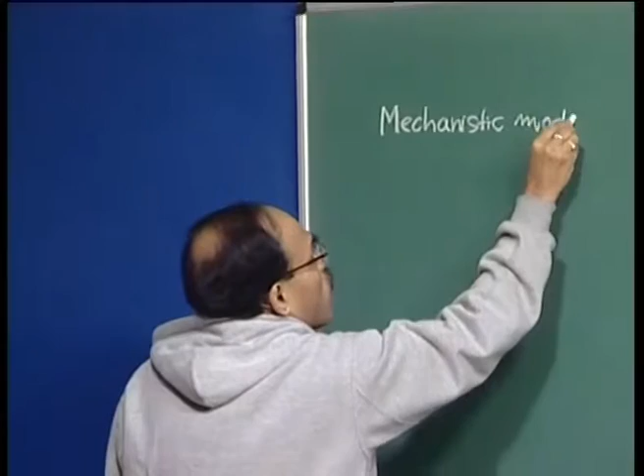Now, how many types of mathematical models do we generally encounter in steel making? Broadly speaking, we would say that we have a mechanistic model and empirical models.

There are many subdivisions possible, because empirical models, for example, can be classified based on the standpoint from which they are derived. For example, I can derive an empirical model purely based on regression analysis - I hope you have heard this term. On the other hand, I can derive an empirical model based on some dimensional reasoning or dimensional analysis, as well as some experimental data.

Finally, I can derive the empirical model also from the viewpoint of an artificial intelligence procedure or technique, such as applying genetic algorithms or artificial neural nets to derive it. So many further subdivisions are possible.

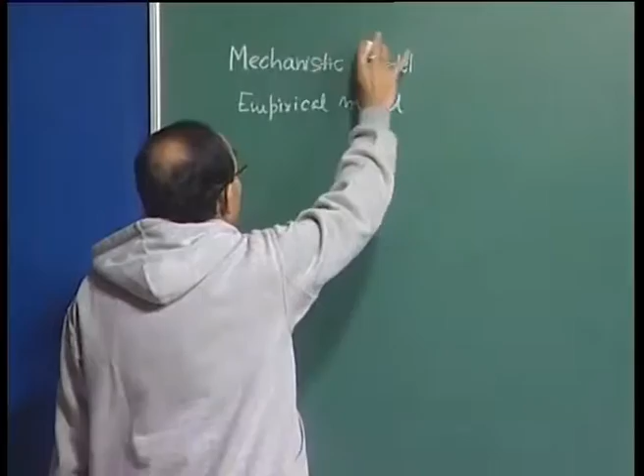Mechanistic models, for example, we can derive from various standpoints. These are, as the name suggests, based on certain conservation principles. People may subdivide mechanistic models further, say in the context of population balance, but nevertheless we would be talking about some conservation principle, some balance principle.

On the other hand, empirical models are derived purely from an experimental standpoint, embodying experimental data. The further subdivisions of mechanistic models are not of our immediate interest. We will consider models under only these two categories: either it is a mechanistic model or it is an empirical model, as far as we are concerned.

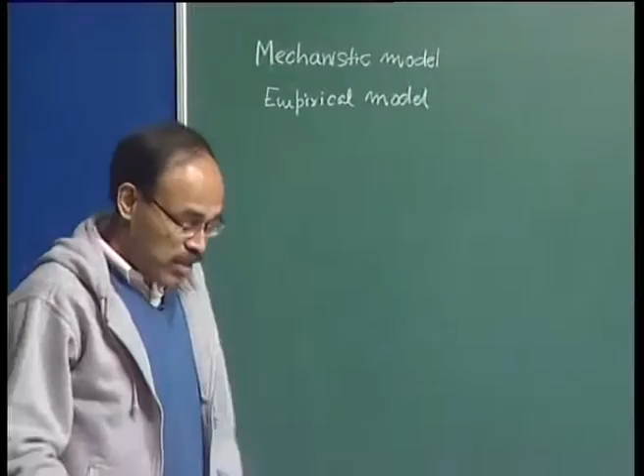Now, mechanistic models, for example, are based on the conservation principles. Conservation of what? Conservation of mass, conservation of momentum, conservation of energy, conservation of population balance, and all these kinds of concepts can be used to formulate the model.

Because mechanistic models are based on solid scientific principles, as the name itself indicates, the fundamental laws of physics these models are based on. Therefore, a mechanistic model formulated in India will equally work, provided we have derived the model realistically, in other countries as well.

But for example, an empirical model which we may develop and which may be specific to a particular plant may not work for all different plants, because empirical models contain experimental data points which are specific to a given plant or given set of conditions. So they lack universality. On the other hand, mechanistic models are sufficiently general, not governed by geographical boundaries, and they work across geographical boundaries, provided we can formulate the mechanistic models correctly.

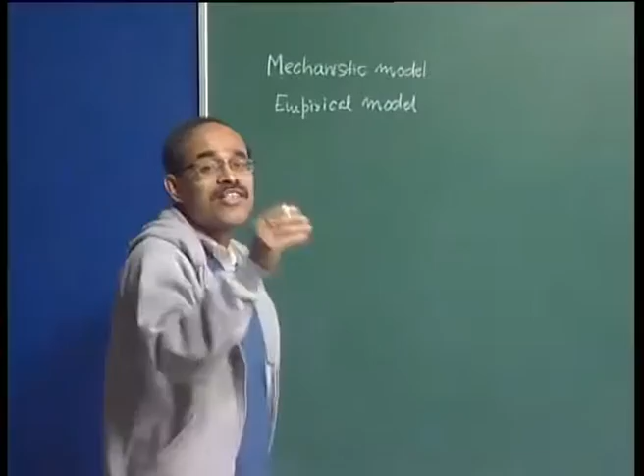For example, I can say that we can carry out a heat balance and write a heat conservation equation, which can be a very complex equation in terms of the geometry or the process itself, not a simple one dimensional equation. So I can write a heat conservation equation and say that this represents the mechanistic model for a given process.

Empirical models, on the other hand, you can look at them like algebraic equations. Mechanistic models, most of the time, will appear as partial differential equations to us. As we discuss this further, it will be clear to you.

Now, I have also indicated that when we try to develop a mathematical model, we have to first define the problem, what we want to develop. So merely saying I want to develop a model for a ladle, or I want to develop a model for continuous casting, is not enough. The foremost or most important task is the problem identification or problem definition. This is the first step in mathematical model building.

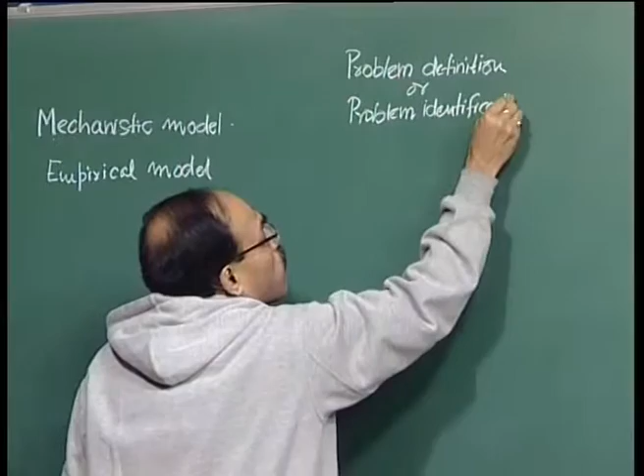Let me illustrate this with an example. Suppose I have a furnace, a furnace chamber, gas fired, so you have burners from all sides. This is the top view, looking from the top. That is the cross section of the furnace, and we see burners here everywhere, from all sides. These are gas burners, and my objective could be: I have a slab sitting here.

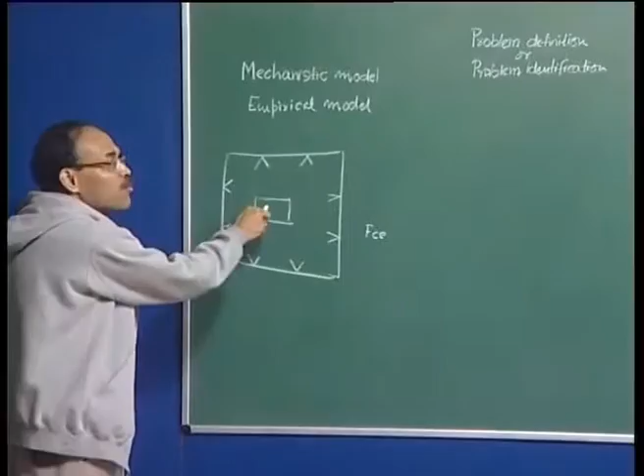Which is a continuously cast slab. I have put that slab, and the interest here may be to find out after what time following its insertion the slab will attain a certain temperature. Because once continuously cast slabs are formed, you take them after some time gap into a reheat furnace, heat them up to the recrystallization temperature, soak them so that they are homogeneous, and then transport them for further processing in the rolling mill, etc. So, I may have a furnace running at a temperature of 1200 degrees centigrade.

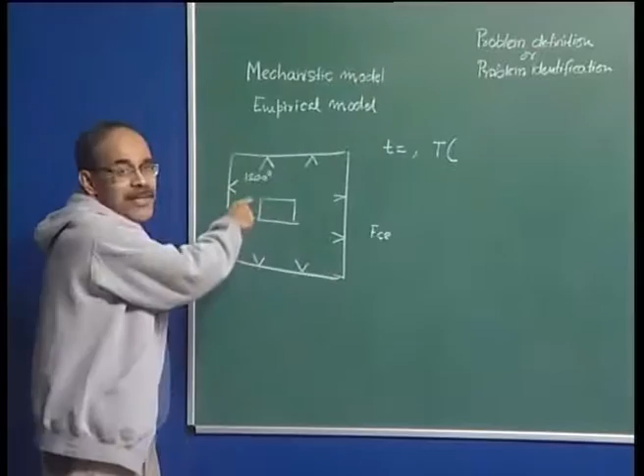I may have inserted the slab at time t equals 0, when the slab temperature may be everywhere, at all points, because this slab is a 3-dimensional geometry. So temperature at all values of coordinates, if I define the system by x, y and z coordinates, represents that at t equals 0, the temperature everywhere is T0, which may be say 25 degrees centigrade. That means the slab, following continuous casting in the bay area, has cooled down to room temperature.

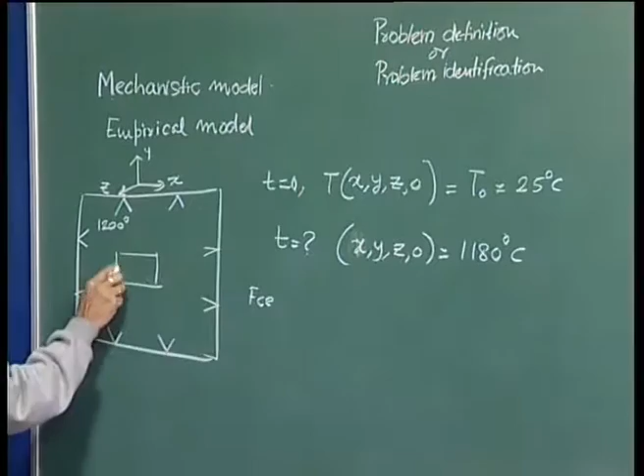And now I am putting it back into a reheat furnace, and I want to find out, give me the time, at what time, for all points, the temperature becomes say 1180 degrees centigrade, just putting a reasonable value. So I want the slab to be homogeneous in terms of its temperature, that at some point of time everywhere the temperature is 1180 degrees centigrade. I want to find that.

One way would be to direct a radiation pyrometer through some windows onto the surface, but the radiation pyrometer will give you only the surface temperature. You will not be able to find out the inside temperature, whether the slab is all through homogeneous or not. So the problem definition is clear here: I want to find out the homogenization time for a given slab inserted with an initial temperature field to obtain a final temperature all through of about 1180 degree centigrade. So this is the problem.

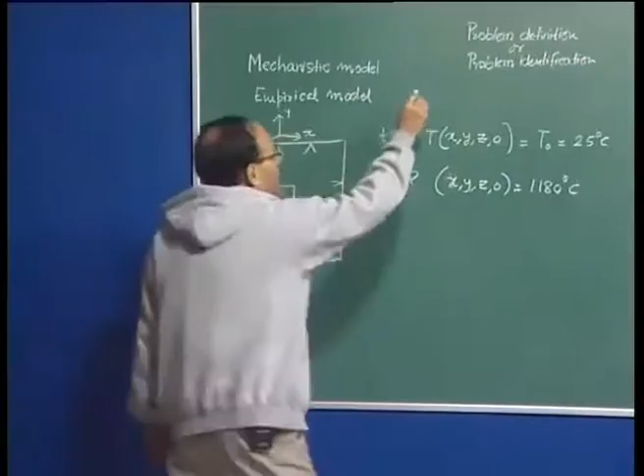Now, once I have identified the problem, next comes the stage called conceptual modeling. So the definition, and this is the most important part actually, is the problem definition and identification. How clearly can you define the problem? The more certainty with which you define the problem, the easier it will be to formulate the mathematical equation.

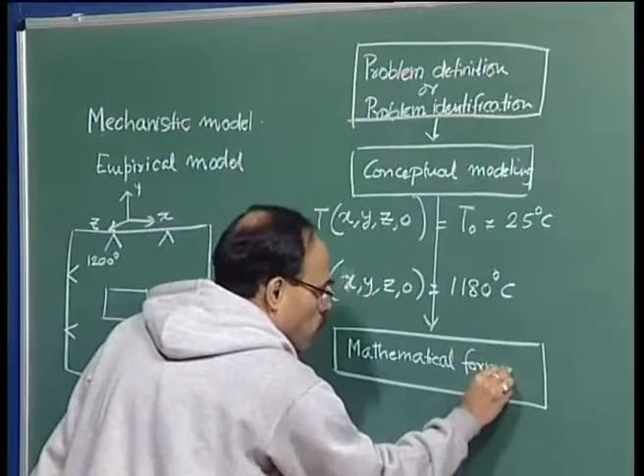Then comes conceptual modeling, which is a stage before the formulation. After this we have mathematical formulation. Before mathematical formulation, before you can write the equation that describes the temperature within the object, and solve this equation, which is essentially an unsteady state equation because it is time dependent and a 3-dimensional equation, we are talking about heat flow in the system, thermal energy conservation. So before we formulate the equation, in which coordinate system we will write it, how many terms the equation will contain, all these things require a bit of conceptual modeling, which is a very important part.

For example, in conceptual modeling, you will try to address: well, I have the furnace, I have the slab geometry, what coordinate system do I want to use. Equations would be derived depending on the geometry. Maybe you have a spherical geometry, a cylindrical geometry, or a Cartesian geometry. Based on that, you derive the equation. So you can say, well, is the object really a 2-dimensional object or a 3-dimensional object.

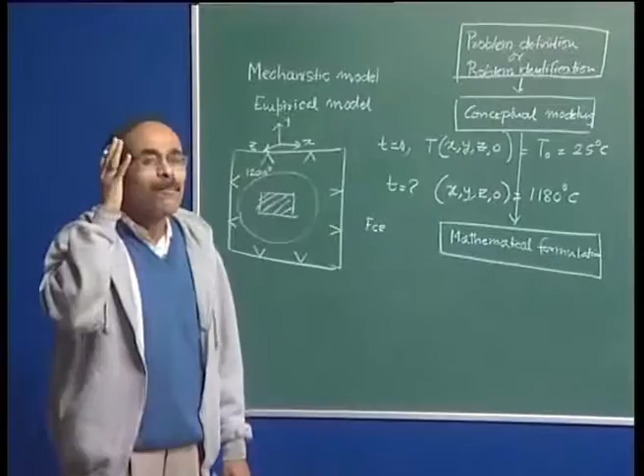Thirdly, you can ask: how do I solve this problem? Do I have to solve for temperature within the furnace environment and within the solid also? Or can I assume the furnace temperature everywhere is 1200 degrees centigrade, with heat transported to the surface of the solid slab by radiation, and then formulate the problem? A series of questions need to be asked to get the complete picture of what you are really looking at. Only after this are you in a position to write the governing equation, or formulate the problem mathematically.

For example, I can go in the reverse direction. If I write down the equation, it goes something like this: this is the heat conservation equation, and then I write this particular equation.

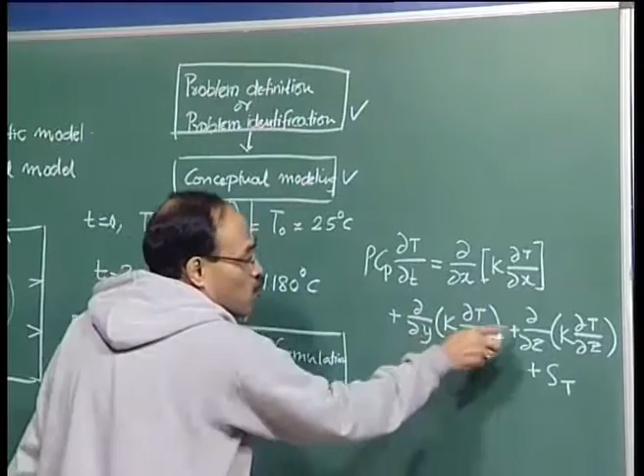These are the transport of heat through conduction within the solid. So this is conservation of heat energy within the solid. This is the unsteady state term, because the temperature initially is T0, gradually changing and approaching the 1200 degree mark. So this is the unsteady net rate of accumulation, this is conduction along the x direction, conduction along y direction, conduction along z direction, and then we have the source term.

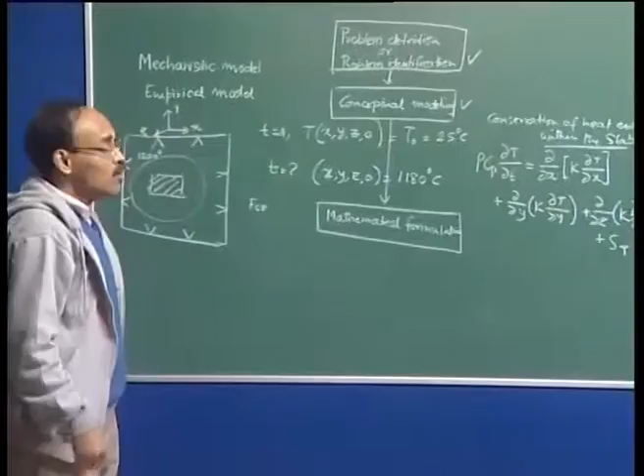So once I write this equation, you will immediately know that I am considering an unsteady state phenomenon, a 3-dimensional phenomenon in directions 1, 2 and 3, and that there is a finite heat source term in the system.

For example, this may initially be ferrite-pearlite steel, plain carbon steel containing ferrite and pearlite, and we know that when we heat the sample, the ferrite and pearlite combine in certain proportion to give rise to austenite. So a solid state phase transformation reaction may take place within the solid, producing some amount of heat, which must be accounted for in the governing equation. So looking at the equation, you can backtrack and find out for what conditions you have written it.

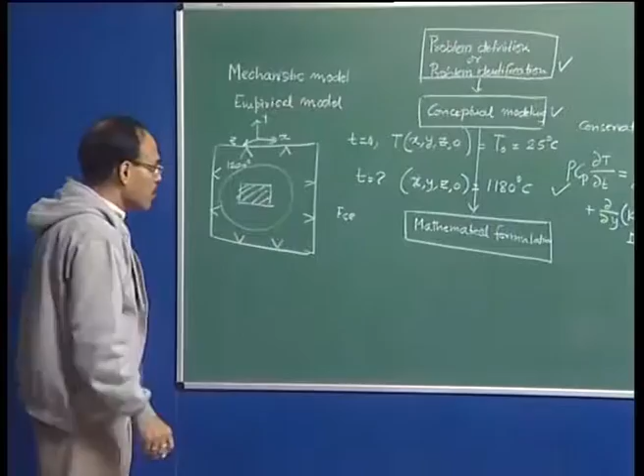Similarly, if I go in the reverse direction: I consider an unsteady state equation, a 3-dimensional phenomenon, a Cartesian coordinate geometry, and conduction taking place only within the solid — I am not bothered about the surroundings, because my objective is to find out the time for the slab to attain a temperature of 1180 degrees centigrade. The surroundings are not of immediate interest; it is the solid object which is of immediate interest. So I can say: Cartesian coordinate, 3-dimensional, source term, unsteady state problem — and then the task becomes simple. It is an unsteady state 3-dimensional heat conduction problem with a finite source term.

Of course, as a modeler, you now have to provide an expression for the source term ST. You must understand that this represents only one equation, and hence we can at most have one unknown, and the unknown here is the temperature, which, as the equation indicates, is a function of x, y, z and t. So we will have to have some expression for the source term, and this source term itself may be temperature dependent.

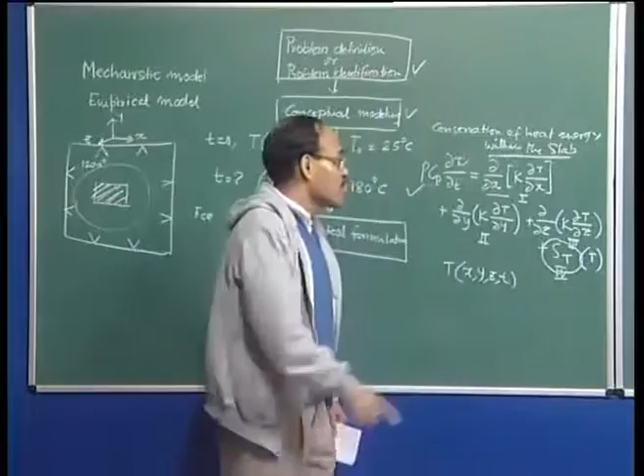If you remember the iron-carbon phase diagram, you can look at the tie lines and find out that the proportion of austenite will change depending on temperature. So this ST is actually a function of temperature. This is therefore a non-linear heat source term, because unless you know the temperature, you will not be able to predict or solve this particular equation.

So as far as the formulation is concerned, we can now formulate the problem. I will come back to it, but note that because we are talking of a mechanistic model, and mechanistic models always give rise to partial differential equations, we have to not only write down the equation but also provide the boundary conditions. Formulation essentially implies writing down the governing equation and the corresponding boundary conditions — only then is the statement of the problem complete, and only then can we say we have formulated the problem correctly.

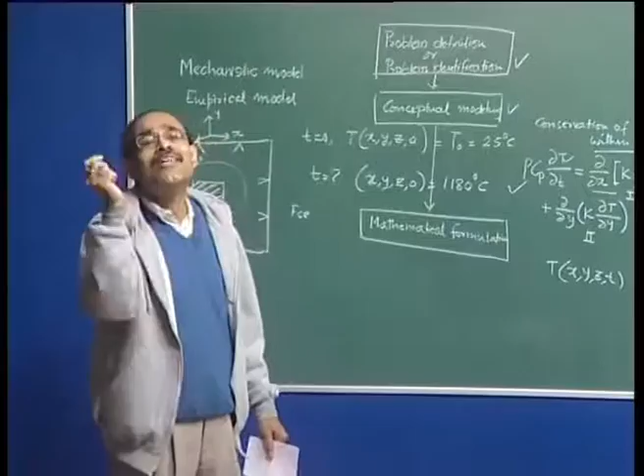This exercise can be taken, for example, in the context of ladle metallurgy. Say I have a ladle gas injection procedure, and I've added ferroniobium solid, and I want to find out after what time it gets completely dissolved in the steel bath. So your problem definition is complete. Now you have to look at the slag contents.

Next, we go to conceptual modeling. It is a cylindrical system, but the plug is located away from the axis of symmetry, so it's a 3-dimensional problem, and it's a multi-phase problem. I have gas injection, a slag layer, and melt. Do I solve it as a multi-phase problem? Do I solve it as steady state or unsteady state?

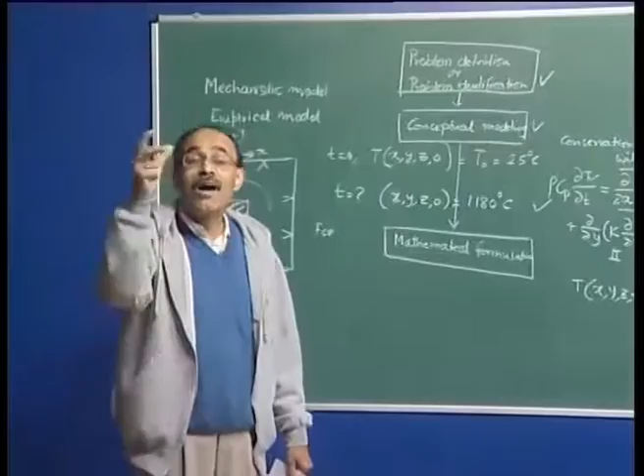So all these questions you are going to ask, and having conceptually modeled the situation, I can say that because dissolution is a mass transport phenomena, I have to have the flow in the system known. Therefore, I have to solve the fluid flow equation. Having obtained that, I will solve the mass transport equation, because dissolution is a mass transfer phenomena, and that is how we formulate the problem.

Once we write the conservation of momentum, or fluid flow equation, and conservation of mass, or the mass transport equation, we will write the boundary conditions, and then we have formulated the dissolution of ferroniobium in steel in a realistic manner, because we have written down the corresponding governing differential equations, together with the boundary conditions.

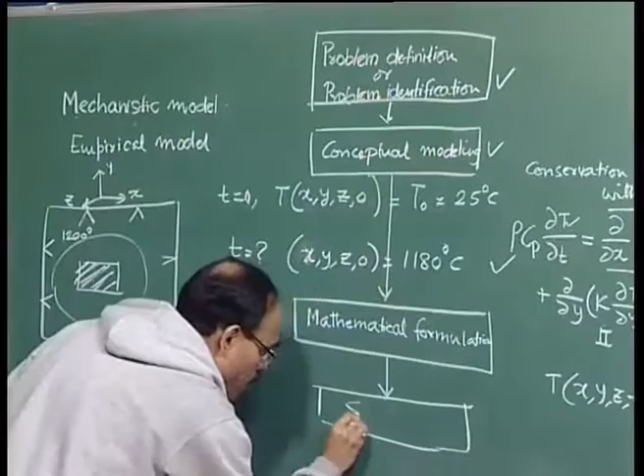Once you have the mathematical model formulation, we are going to solve these equations. Solution is very important for us, and we will discuss this in detail later on, because these partial differential equations, in most cases, you will not be able to solve analytically.

Analytically means, suppose you have solved many differential equations, non-homogeneous equations, written complementary functions, simple ordinary differential equations. Even unsteady state equations can be solved by hand through product solution techniques, error function solution techniques. But these equations cannot be solved by hand, which means if you give it pen and paper, you will not be able to solve these equations.

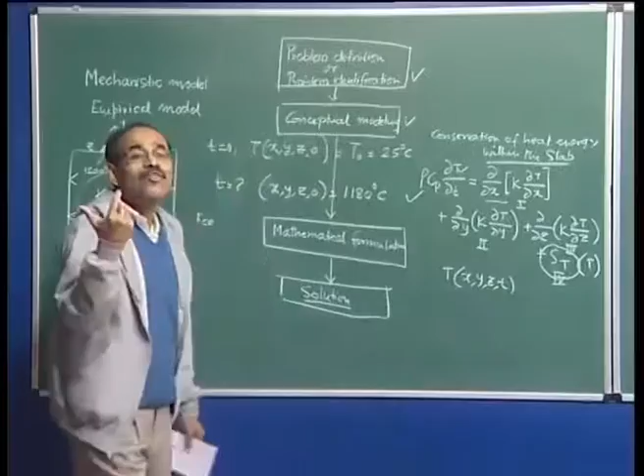You have to resort to numerical techniques to solve this equation. What does a numerical technique do? A numerical method basically converts a differential equation into a set of algebraic equations, and then we solve the equations.

So the purpose of the numerical method is to convert a given differential equation into corresponding algebraic equations, and once we have a large number of algebraic equations, we require a digital computer, otherwise it will take very long to solve. So the set of algebraic equations can be solved with the aid of a suitable solution algorithm or computer program.

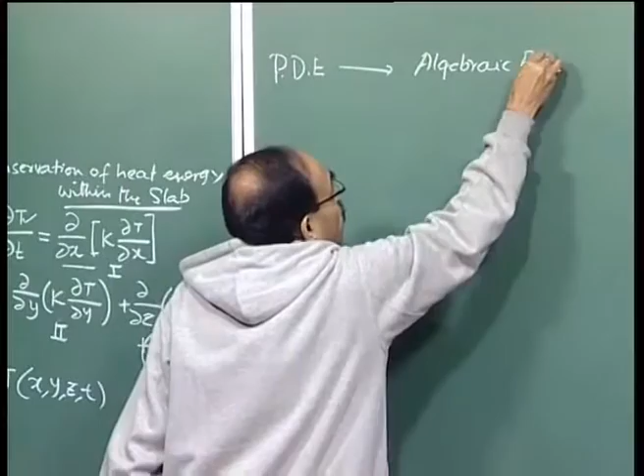Partial differential equation, PDE, gets converted to algebraic equations in solution. Not just one algebraic equation, but many algebraic equations, and what connects the two is the numerical method.

One important point I would like to make is that there are innumerable numerical methods available by which you can translate a partial differential equation into a set of algebraic equations. Therefore, the form of the algebraic equation is going to be different depending on what kind of numerical method you have applied to translate the differential equation.

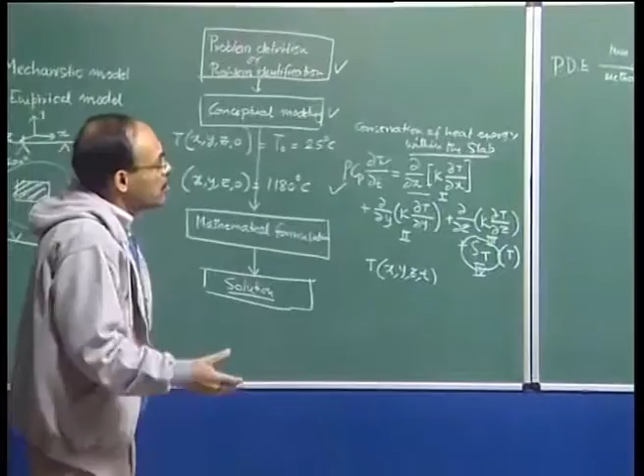For example, if I take a differential equation and use Taylor series approximation, I will get one type of algebraic equations. If I use a different algorithm, for an ordinary differential equation there are innumerable algorithms, like Runge-Kutta method, Runge-Kutta-Gill method, second order method, fourth order method, Adams-Moulton method, and so many others, and in each case the final algebraic equation looks different.

So the solutions of the algebraic equations are also going to be different depending on what numerical methods we apply. But we must understand that the partial differential equation together with the boundary condition defines a problem explicitly, which implies that we have to have a unique set of solutions.

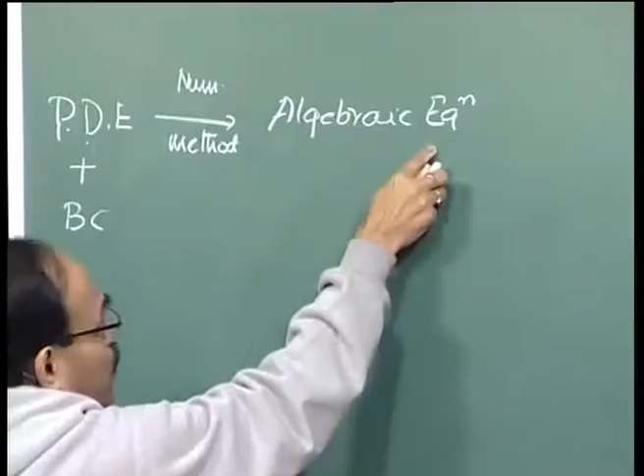Now, since different numerical methods produce different algebraic equations and hence different solutions, this seems to contradict my statement. But mind that eventually, when we convert the differential equations into algebraic equations, we solve the equations at discrete locations in the system, which we call the various nodal points.

So, when the large nodal points are used in the system, or the resultant number of algebraic equations is very large, the solution, despite different numerical methods, is going to be identical. That solution is what we call the grid independent solution.

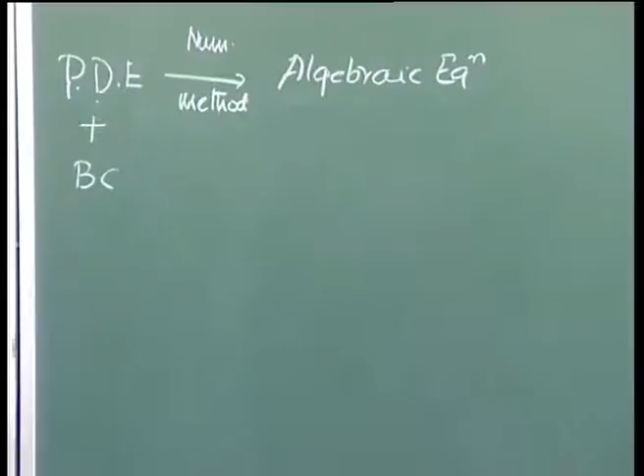When you do mathematical modeling, it is very important to establish a grid independent solution, which is a meaningful solution reflecting the solution of the differential equation together with its boundary condition. So we solve the equation, and we can try to get a certain asymptotic solution for which I have an analytical solution. For example, I have a 3-dimensional equation that I have written.

Now, if I set this term equal to 0, that is a steady state phenomena with no source term. Then I have a pure steady state heat conduction in 3 dimensions, and if I now say that all surfaces are fixed at certain temperature, a benchmark situation which has nothing to do with the actual problem.

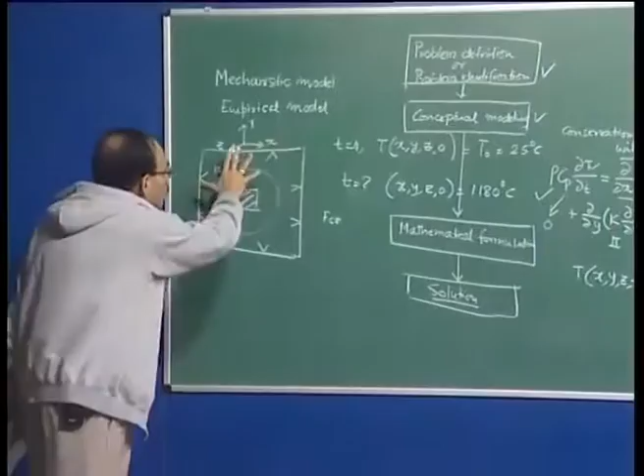I solve the equation, but I have to understand and know that this conversion is a correct algebraic equation, and that the solution I am going to get is a meaningful, correct solution. How do I test it?

So under certain limiting or asymptotic situations, I am going to solve these equations, and a typical benchmark or limiting situation is that we write down the complete model based on the conservation and solution techniques. In the computer program, let us set this source term to be 0, considering a steady state situation by setting this to be equal to 0.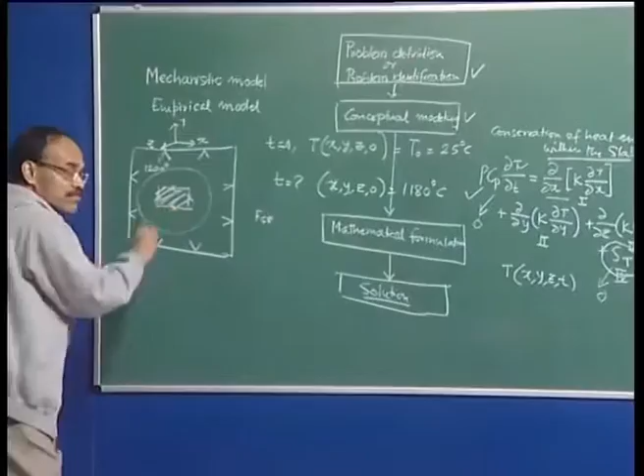We then find that the problem converts to a steady state 3-dimensional scenario, and if we further assume that all surfaces are maintained at a constant temperature, not necessarily the same, then an analytical solution to this particular problem is possible, which is given in standard heat conduction textbooks.

So I can run my computer program, solve the equation, and for this particular limiting situation compare with my textbook solution. Then I can say there is a reasonable certainty that the programming I have done is correct.

Because it is able to replicate many such solutions given by other people or other sources. I am not the first person to solve this equation; there may be many other people who have solved these equations for different cases or different boundary conditions.

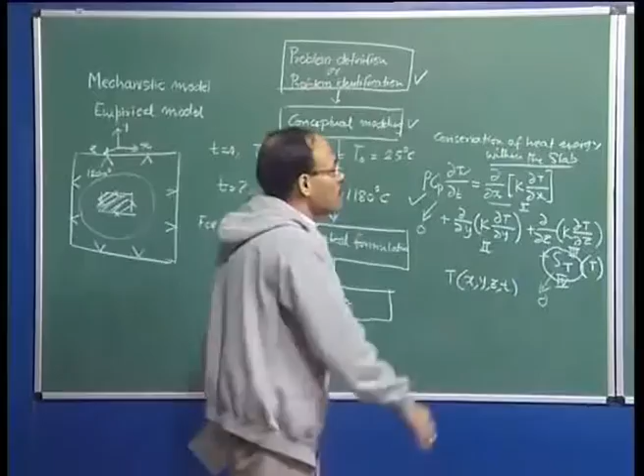So I can also run my computer program, or my solution of the differential equation, for certain situations which have been relatively well investigated and reported by previous investigators, and then I can say that I have developed a computer program.

The computer program produces estimates of temperature that agree well with those reported by various other investigators. So I have some confidence that the computer program, or the solution methodology I have developed following problem definition, conceptual modeling and mathematical formulation, is indeed correct and gives reasonable estimates.

So, having obtained some confidence about the numerical solution technique, I am going to bifurcate, and in one stream I am going to run this program in its entirety. Now no more asymptotic solution; I am going to use the exact equation which I have written.

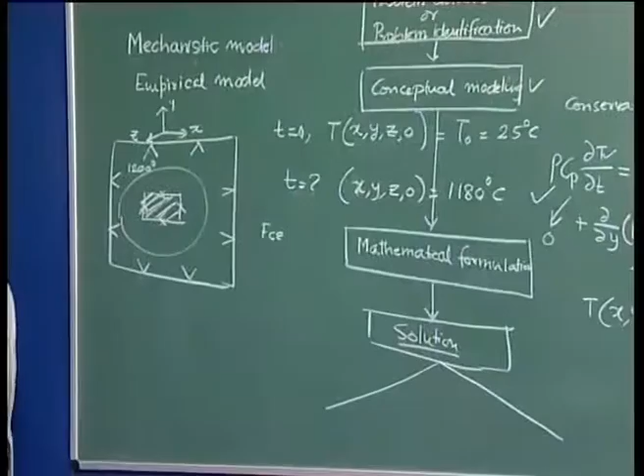I am going to write down the exact boundary conditions, what type of boundary conditions are there. Of course I am not detailing it now, but we know every differential equation will have some boundary conditions and initial conditions. For example, a simple second order ordinary differential equation, if you integrate it, you will get two constants of integration.

How do you derive those constants of integration? You obtain these constants of integration from the boundary condition. So similarly, we will have 7 boundary conditions attached to it.

There is a second order term: 2 conditions on x, 2 conditions on y, 2 conditions on z, and 1 condition on t. So with 7 conditions embedded, I should be able to solve the exact problem that I identified in the beginning.

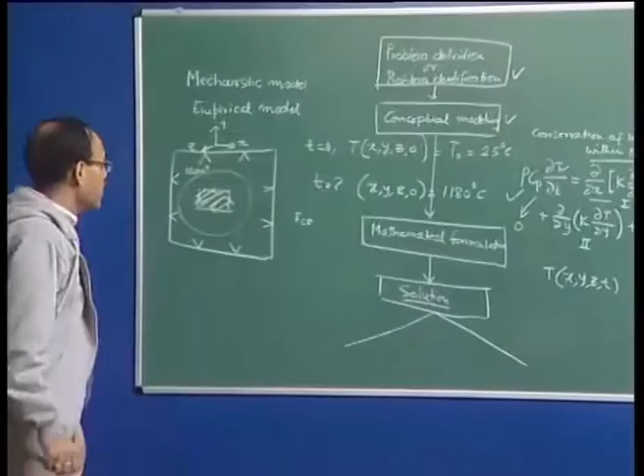So I can solve the problem for industrial simulation.

When I do industrial simulation, I have been able to find out the inside temperature and outside temperature at various times. So I want to check whether my results are correct or not. Parallelly, along with industrial simulation, I can carry out some experiments using techniques to determine the surface temperature, for example, and then compare the two.

These experiments can be carried out, for example, with a contact pyrometer or an optical radiation pyrometer, so I can measure from a distance what the surface temperature is at a certain time. The model can also predict, once you do the exact simulation of the industrial process, the time-temperature history at various locations. This comparison gives us an idea whether our model has been correct or not.

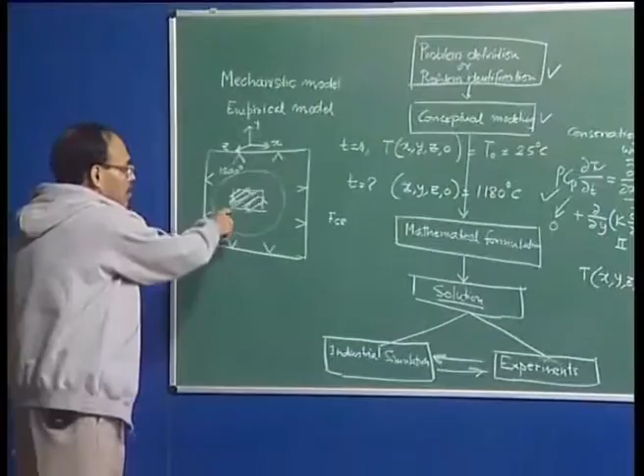There may be many assumptions involved in formulating the governing equation and the boundary conditions. For example, for the heat source term, we can make various kinds of approximations in order to formulate how heat is liberated because of the solid state phase transformation. Also, in formulating the transport of heat from the surrounding to the surface, whether by convection or radiation, what is the heat transfer coefficient, what is the emissivity of the surface - many assumptions and idealizations may be there.

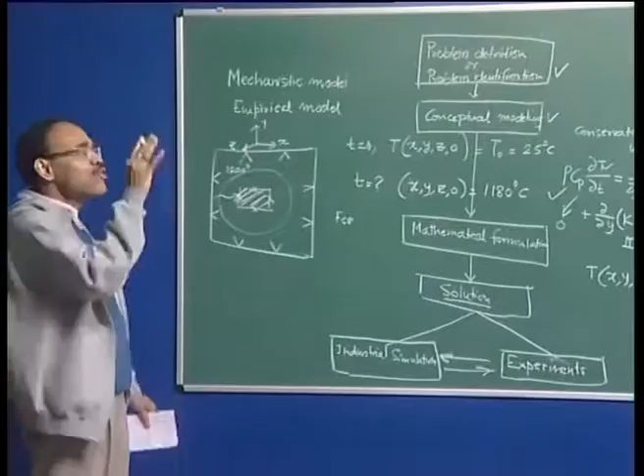So we are not expecting one-to-one correspondence between the experiments and industrial simulation. There will be some amount of uncertainty, and therefore it is always desirable, as I have mentioned, that models without measurements are incomplete. In any sensible investigation, we have to have experiments and model simulation in parallel, and this gives us some idea how realistically we have formulated the model and the boundary conditions.

At this point we may find that some tuning is necessary, because we have made some assumptions and idealizations, so there is some discrepancy or difference between the prediction and the measurement. In order to match the predictions with experiments, we call this process force fitting.

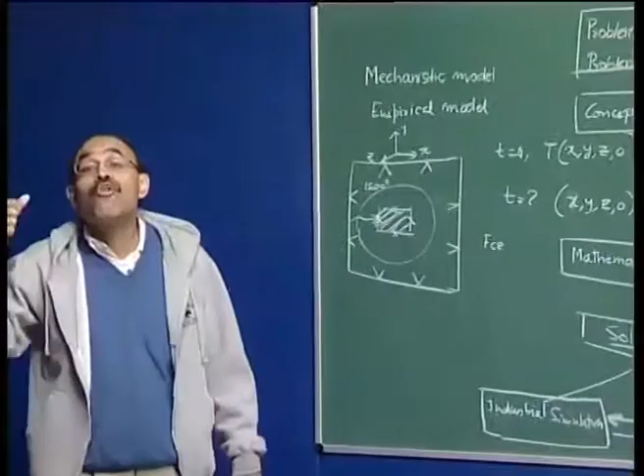So now, at a given location - say time t, and a location X, y, z at a certain time t1 - suppose at this specific location X, at time t1, the temperature varies as a function of y, z and t. At this particular location, suppose the temperature varies something like this. This is my prediction.

I would write it the other way: let us fix y and fix z, and plot temperature as a function of x and t. So this is temperature at location x as a function of time.

So this is my prediction, and I find that my measurements are going like this. In that case, it may be possible to do some tuning and bring all the points a little bit closer, and now my points have become like this. I am forcing the points - these are actual observations - to correspond to the prediction.

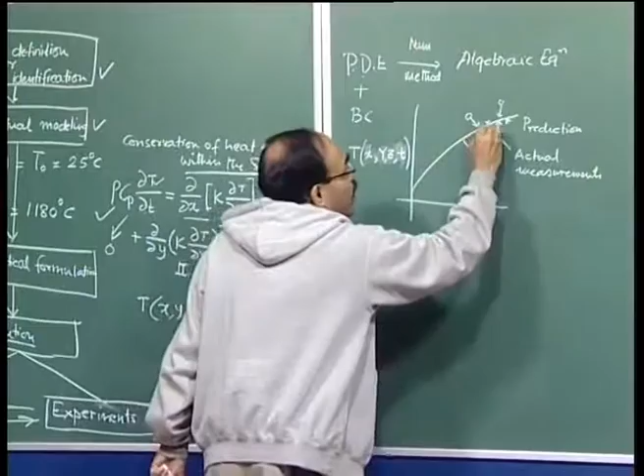What are the reasons for this difference? My actual measurement is here, while the line goes a different way, and the actual measurements differ from the line because of the idealizations and simplifications we made in formulating the model.

So this is not going to be a very realistic model, and I want to bring this closer - for example, I can move this line a little bit here. So these are my actual measurements, and this is the line that I have predicted.

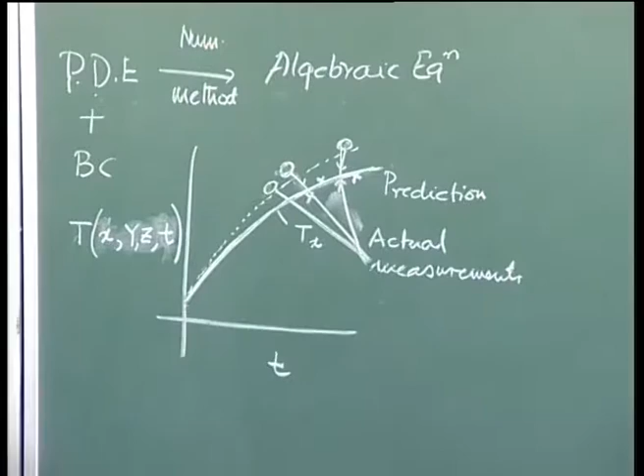There is evidently some difference between the experimental points and the model line. Now, I cannot change the actual measurements - these points cannot be altered. But I can change the model - the line can be brought closer by changing certain parameters, for example changing thermal conductivity, boundary conditions, or the source term, which should let me take the prediction up or down. This stage of bringing the prediction closer to reality is termed force fitting, and the result is the tuned model.

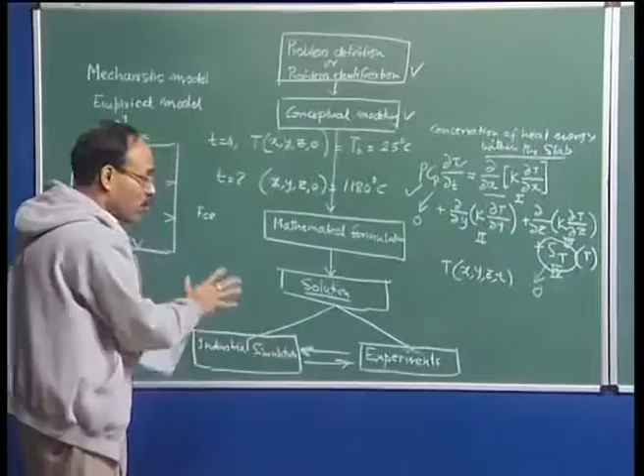In many cases model tuning is going to be necessary because we have made certain idealizations. These two steps determine when you do industrial simulation, carry out experiments, and find large differences between the two. In that case, we tune the mathematical model, introduce some fudge factors, adjust the heat transfer coefficient, adjust the thermal conductivity value, manipulate the source term to get better correspondence with experimental measurements. This dotted line shows that with model tuning I have been able to get the trend of the actual variation fairly realistically. So this is now an industrially tuned mathematical model, all set for implementation on the shop floor for process analysis, design, optimization, whatever you would like to consider.

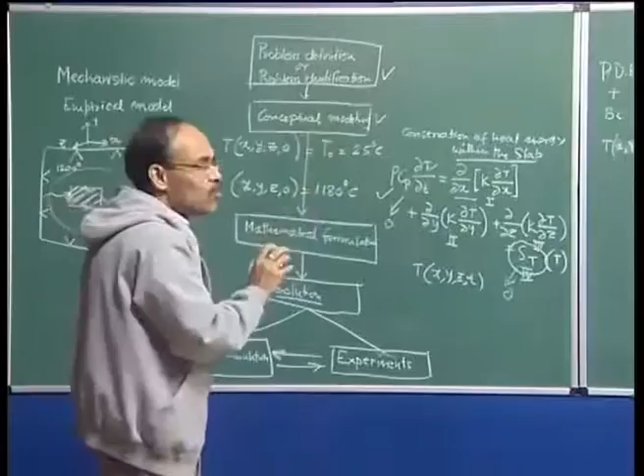Now, coming back to this particular issue. I have discussed how the models are formulated. Now we understand that in many cases tuning of the model is going to be necessary. I want to elaborate this.

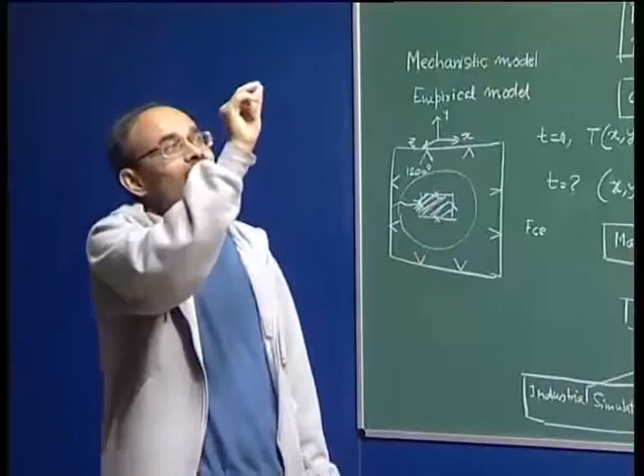There are many cases when we can formulate the equations exactly. For example, if I have a pipe flow problem, flow of fluid through a pipe, I can write the exact equation, the exact boundary conditions, no problem. I can get an analytical solution, and I will find that analytical and numerical solutions match exactly with the experimental observation. Suppose I measure the velocity with a laser Doppler velocimeter. If it is a transparent tube, I can measure the velocity with a PIV, or with a hot film anemometer. I can compare with my numerical model for fully developed flow through a pipe. There will not be even a little difference between prediction and experiment; prediction and experiment will match in toto, so there's no question of model tuning.

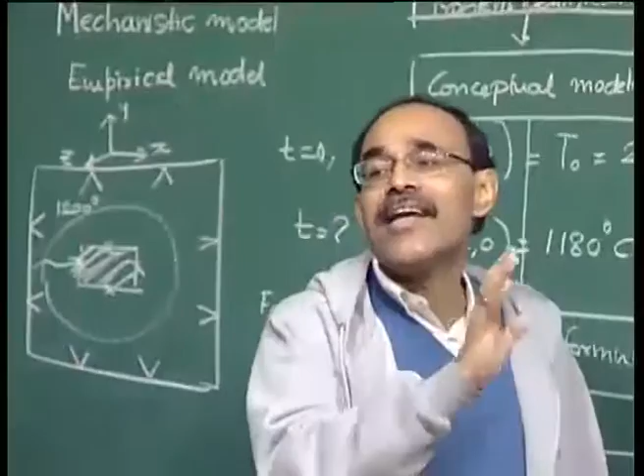So we can see that there are certain physical situations for which we can formulate the problem exactly. We can write down the governing equations correctly, and there will be no problem as far as matching of prediction and experiments are concerned. This is the first category of the problem.

The second category of the problem is where our understanding is not complete. Therefore, many idealizations and approximations will go into model building. In that case, we will invariably expect that the model predictions and experimental observations will not match, because our understanding of the physical scenario or physics of the process is not totally clear.

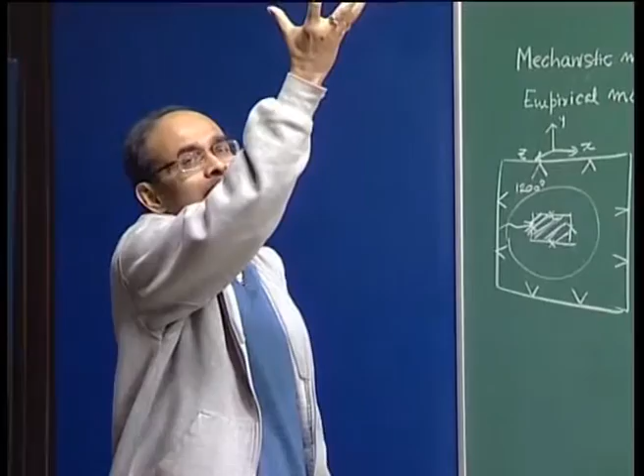For example, when you inject argon gas through the ladle, how a gas envelope forms around the orifice, how it devolves into a plume, how it breaks up, how the big gas envelope breaks up into a number of bubbles, how the bubbles coalesce during their rise or disintegrate - this complete picture we understand reasonably, but it is not absolutely clear as of today. So if I have to write model equations for this phenomena - the injection of gas, formation of a big gas envelope, its breakup into bubbles, the coalescence of bubbles into bigger ones - and write down the model for bubble size distribution incorporating all this, we will see there is going to be a lot of idealizations and assumptions.

In the secondary cooling zone of a continuous caster, if I want to develop a mathematical model for heat transfer coefficient from first principles, again our understanding is far from complete. You have a nozzle through which spray mist comes - spray mist is air and water. The spray mist impinges on the surface of the billet, and in the process breaks down into a number of droplets, impinges on the hot surface, and removes heat from it. This process is extremely complex, and our understanding of droplet formation, breaking of the continuous stream into droplets, impingement of droplets, evaporation, etc. at the surface, are far from being complete.

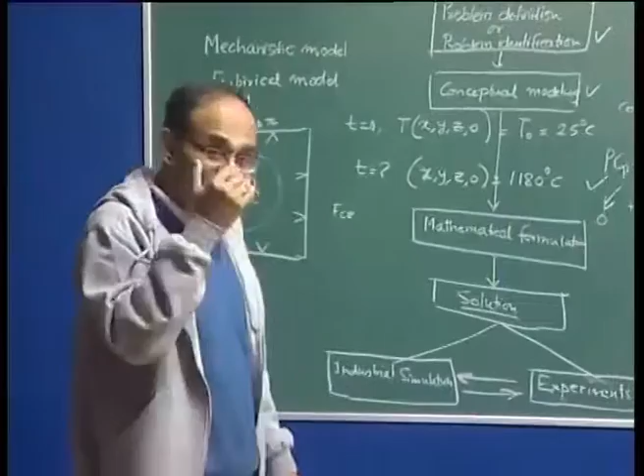As a result, when we try to formulate problems for these scenarios, considerable amounts of idealizations and approximations will go into model building. Unfortunately, steel making processes fall in this second category.

Steel making, mathematical models of steel making are not going to be like pipe flow problems, where we can write down the equation exactly, that we can formulate the governing boundary conditions exactly. No, we will never have this kind of a scenario in steel making, because of the inherent complexities of the subject, because of the nature of the manufacturing technique.

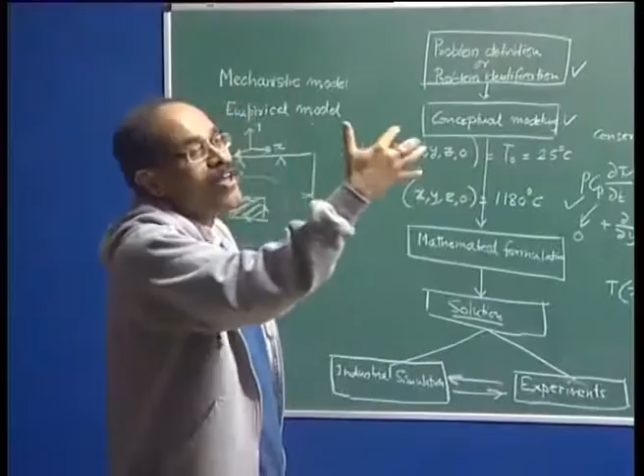So, therefore, it is to be appreciated at this stage that when you build models for steel making processes, inherent problems, inherent idealizations are going to be there in the formulation of the governing equations. Idealizations will be there in terms of formulating the boundary conditions and the initial conditions, and all these are going to be a matter of concern, and all these are going to give us some deviation from the experimental observations.

People in industry today say that if your model can predict within plus minus 20%, 25% of what we see in the industry, we will consider your modeling to be reasonably good. So, that is the kind of range or tolerance we are given because of lack of complete understanding of the subject.

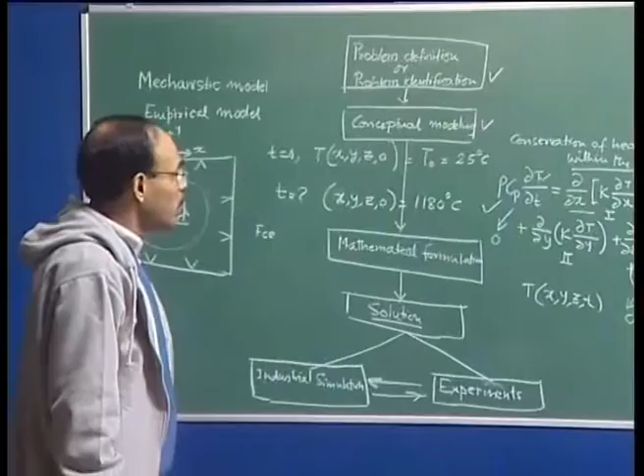Now, we can say that once we have identified the problem, we have solved the problem, we have tuned the problem, we are in a state that yes, we have a mathematical model that has demonstrated performance. Of course, further tuning will always be necessary in industrial optimization and industrial design. So, the mathematical model developed cannot be applied in a straightforward way.

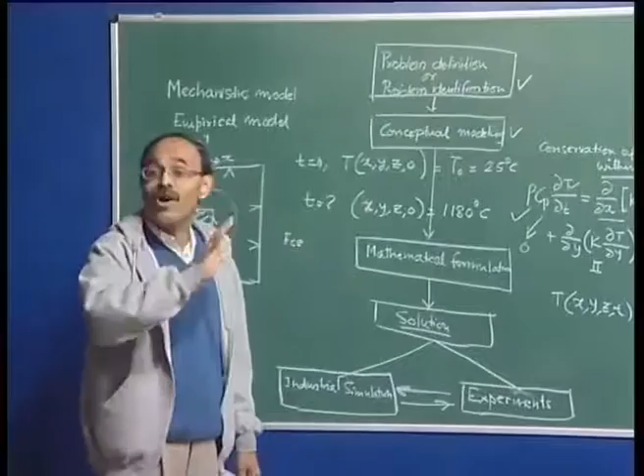Without companion experiments, we will never know the extent of tuning which is necessary. So, therefore, I have been repeatedly telling that merely solving governing equations and boundary conditions is not enough. This is called black box modeling. We have to have companion measurements in order to demonstrate the applicability or suitability of the mathematical model that we have been able to formulate.

Now, let us look at the issues of uncertainty. As we have tried to indicate so far, the formulation of the model as well as the boundary conditions are going to give rise to some amount of uncertainty. Now, I will explain very briefly the context of uncertainty in boundary conditions.

For example, if I have to model that scenario, which again I will draw here. So, there you may require what is the ambient temperature. Now, I can say that, well, the surrounding temperature is 1200 degrees centigrade and it is radiation which is giving heat to the slab through its surface. Now, therefore, somehow I have to know what is the furnace temperature.

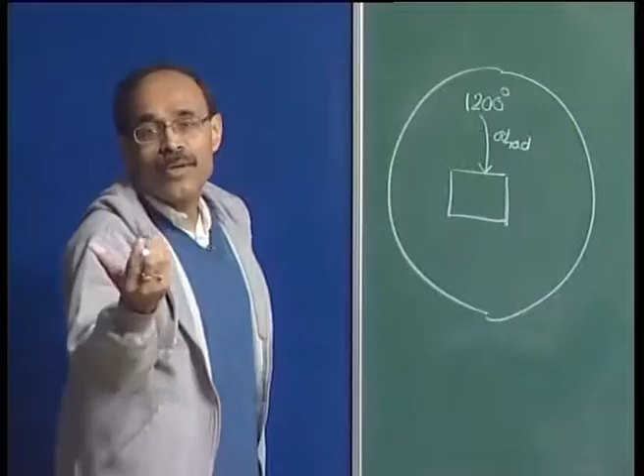So, I have to have measuring devices, and based on that I will know what is the furnace temperature. So, there is going to be some amount of uncertainty when we rely on empirical measurements for the boundary conditions. This surrounding temperature, when I am solving for temperature within the solid, is needed as a boundary condition. And how do you know the surrounding temperature? By carrying out certain experiments or with some temperature controller or pyrometers, etc. So, therefore, those measurement devices also have some inherent errors, so certain amount of error and uncertainty is going to be associated with this.

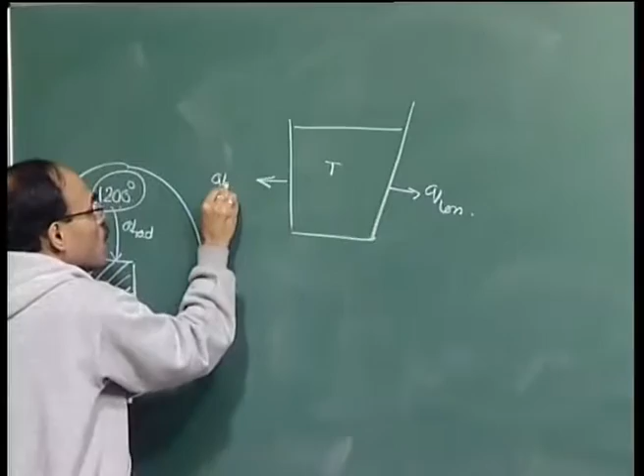Similarly, when you are talking of modeling heat transfer in the melt, we require that the difference in temperature here is a result of Q loss. So, we must know at what rate through the refractory lining in the ladle heat is being lost outside. How can you know this? There is no way of determining it theoretically. We have to put a probe here, either we measure temperature or we directly measure the heat flux through a heat flux transducer, and then tell you the rate at which heat is being lost.

So, when I write the governing differential equation for heat flow within the melt, this information will appear as boundary conditions to the governing equation, where these boundary conditions will be given directly based on experimental observations. So, when you measure these quantities, either the temperature within the furnace or the rate of heat loss through the steel shell in a ladle, these are all empirically determined parameters, prone to error because of inherent problems associated with the measuring devices.

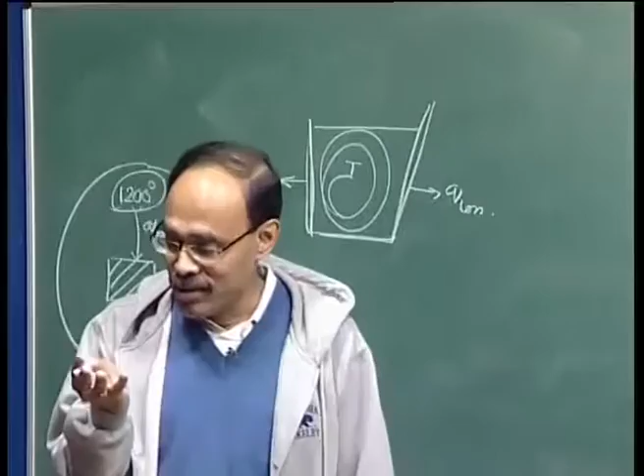So, we understand that the uncertainties are going to be because of, number one, uncertainties in formulating the governing equation correctly, that I have explained. We can also have uncertainties because we do not know, for example, the thermophysical properties of the system, thermal conductivity, how it varies as a function of temperature and composition, which we may not be exactly knowing.

If we do not know, we can say the properties of the system are not known; high temperature properties and kinetic data are not always available. So they also bring in a certain amount of uncertainty - uncertainty in boundary condition, uncertainty in governing equation, uncertainty in high temperature properties and kinetic data are the major sources of such differences.

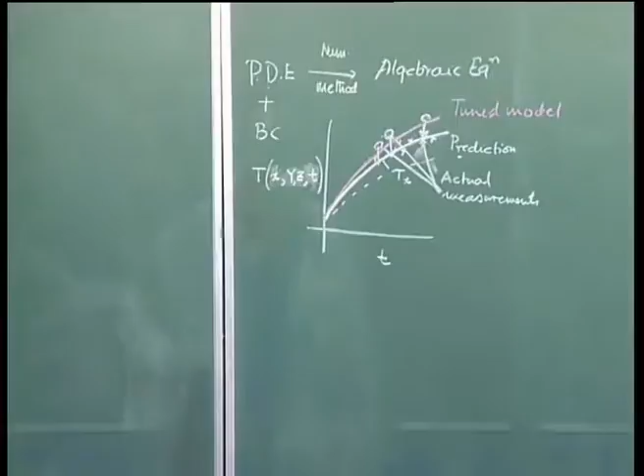That's the difference we are seeing here. These three can be considered the major reasons. We must also understand that numerical methods are prone to some error, but once you hit the grid independent solution, that can be forgotten, because grid independent solutions have to be identical. But certain numerical techniques, if you do not take precautions, can give erroneous results. So numerical error is also one reason. We need a robust numerical method in order to derive a solution from the governing equation itself.

Now, I have written that heat conduction equation very clearly. How do you formulate these equations? Having understood this, let us go back to this particular issue.

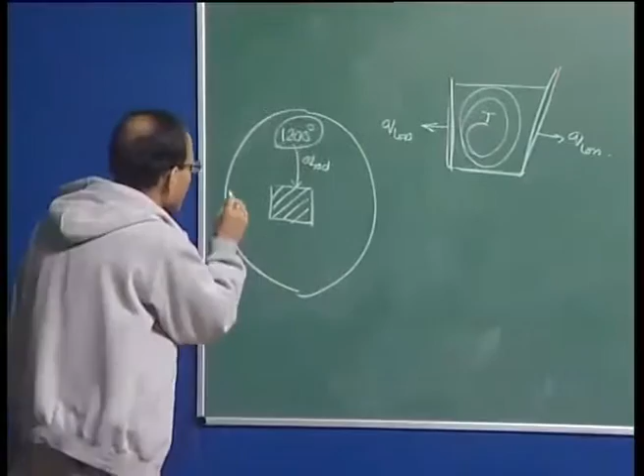Having said that I want to find out the temperature within the solid, I have to write it as a thermal energy conservation, because the temperature at a point within the location is due to the heat being received and the flow of heat within the solid itself - it is governed by that, so it is basically a conservation. The rate of change of temperature at this point is a function of the rate at which heat is being lost, heat is coming from the ambient to the surface, and I should be able to write an equation for this.

So this is going to be an energy conservation equation. Now the question is, how do I write these equations? Do we every time derive an equation from the control volume based approach? For example, you have seen Navier-Stokes equation, Fourier's equation, or Laplace equation - how do you derive those equations?

We take an elementary control volume, and through this control volume we can say heat is coming in, heat is going out, in the x, y and z directions. We have heat coming in one direction and leaving in that direction, heat coming in another direction and leaving in that direction. So the net rate at which the heat content of this control volume increases or changes is a function of the net efflux of heat along the three different directions. So I can set up an elementary control volume and find out the characteristic conservation equation for this control volume.

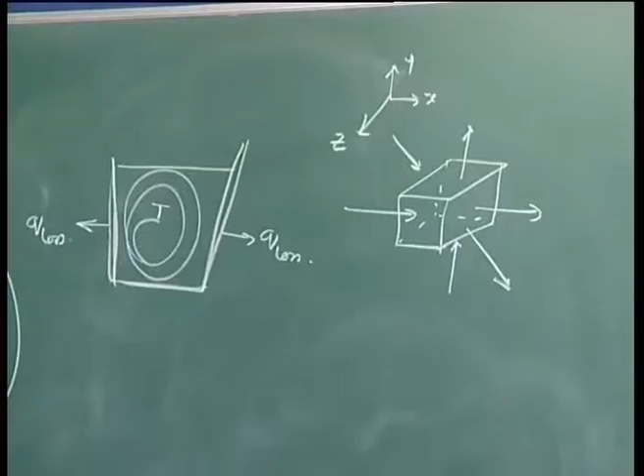Imagine if I take this control volume to be one face merging with the boundary - that is how, through the boundary control volume, I get the boundary information into the calculation domain. This may be an internal control volume, and within it I know it's the conduction terms: conduction of heat along x direction, conduction of heat out along x direction, conduction of heat along y direction, conduction of heat out along y direction, and so on. Because this is an internal control volume, one of these surfaces can very well become the boundary surface, and through that surface we get the boundary information into the system. So one way of deriving the model equation is to set up the control volume, formulate the governing equation, and whatever equation I wrote earlier can be derived very easily by control volume formulation.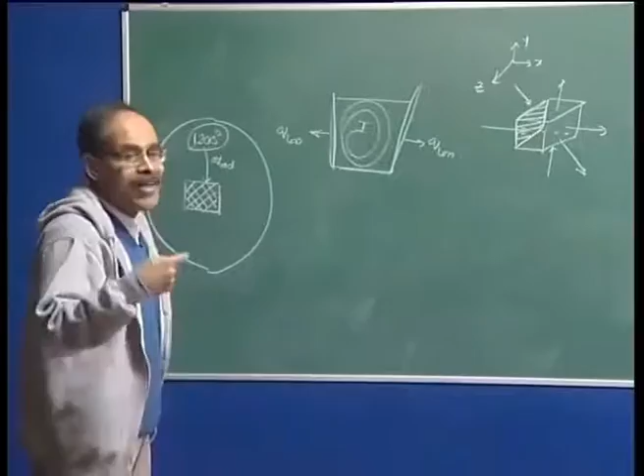But for every problem it is not justified to write down the control volume formulation and derive the equations, because I am not the first person to investigate heat conduction phenomena. There are innumerable other people who have studied heat conduction phenomena, and these equations are documented in literature - documented, which is what I have written, for example.

So now I write it in a more conservative form: divergence of k gradient T plus S_T. If you expand it in three dimensions, you get the second order derivative along x, second order derivative along y, second order derivative along z. These equations are well documented in the literature, so once I understand the phenomena, I can pick up that particular equation from previous work. At most, I should examine whether I am blindly copying this equation, whether it is dimensionally consistent, whether the equation is correct, and whether it is the one I am looking for. So how can you pick it up?

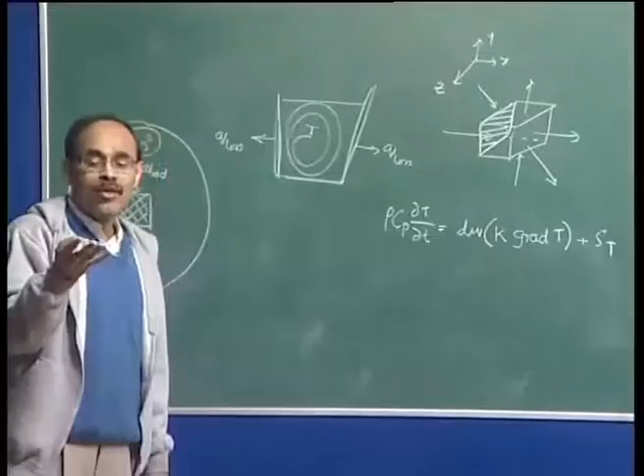There are innumerable equations of heat conduction. I will say 2-dimensional steady state, 2-dimensional in cylindrical polar coordinate, 3-dimensional in Cartesian coordinate, 1-dimensional in spherical coordinate. So, there are a lot of heat conduction equations in front of me. So, how do I pick up the right equation which is applicable to me?

That is dictated by the conceptual modeling. At the conceptual modeling stage itself, I am able to see what differential equation I have to pick up from the literature, so that I can altogether avoid the control volume formulation part. You can of course do this if you have time, but it is not necessary always. The equations are available in the literature. You have to understand the physical scenario and then pick up the correct equation.

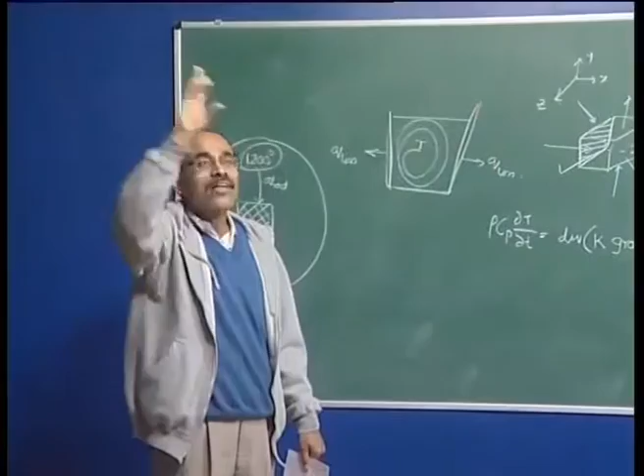So, there are building blocks available - this is called heat conduction building blocks. In heat conduction building blocks, what do I have? I have heat conduction in 3 dimensions in spherical coordinate, heat conduction in 3 dimensions in Cartesian coordinate, steady state. Similarly, I can have 3 other equations: unsteady state heat conduction in Cartesian coordinate, unsteady state 3-dimensional heat conduction in cylindrical polar coordinate, unsteady state 3-dimensional equation in spherical polar coordinate. So, I have a series of equations in the heat conduction building block, and I am going to pick up the right one with my own understanding.

So, therefore, we have summarized various building blocks necessary for mathematical simulation of steel making problems. And these building blocks could be, one could be a fluid flow building block.

Building blocks. What does the building blocks contain? Building blocks contain the differential equations or the mathematical models of fluid flow.

Why so many mathematical models? Because they contain a set of equations written in unsteady state mode or steady state mode, written in 2 dimension or 3 dimension, written in various coordinate systems. So, that is why we have a range of choice available to us. We have to only understand that, well, we got to simulate the fluid flow. So, therefore, we have to go to the fluid flow building block and pick up the correct equation.

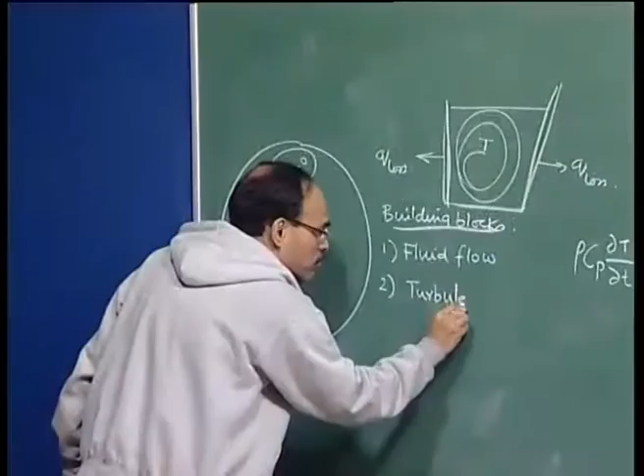We can have building block for turbulence also. There may be various types of turbulence model, as I have mentioned earlier in one of the lectures. So, we can have various kinds of models. You have a choice there, what kind of model you would like to use. According to that, you can pick up the right equation that is applicable to your case.

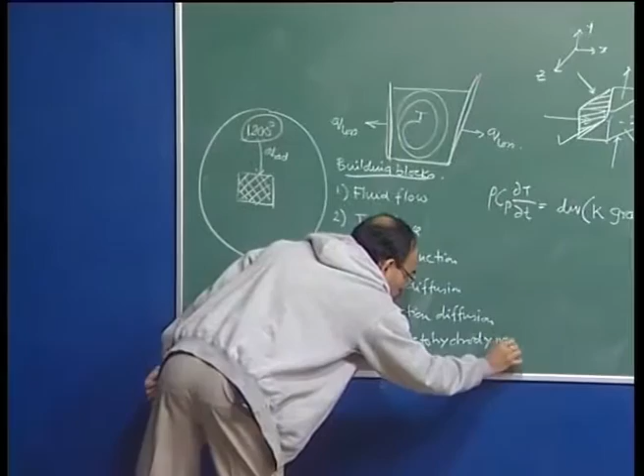You can have heat conduction module, which I have just now discussed, and the counterpart you can have mass diffusion also. You can have convection diffusion. You can have magnetohydrodynamics. There are all modules or building blocks available to us, and there are many such building blocks which are available to us.

So, we have to understand the problem. We have to see what we are trying to model, and accordingly. For example, I will just illustrate - I want to model heat flow within a ladle. Now, I understand that in the ladle there may be some fluid flow involved, because the transport of heat - this is a liquid. So, within the liquid or in the melt, transport of heat is due to convection and diffusion.

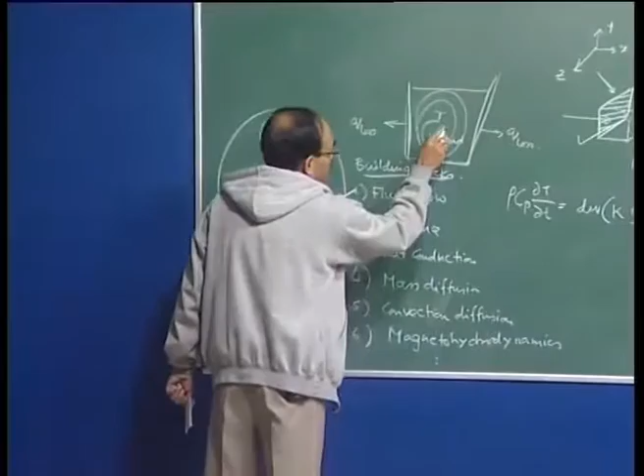Diffusion means it is heat conduction here. So, diffusion is a generic term for all. We have momentum diffusion, we have mass diffusion, we have heat diffusion. So, therefore, heat diffusion is heat conduction, momentum diffusion is viscous diffusion, and mass diffusion is mass diffusion. So, the movement of temperature, the heat will flow from one point to another point because of the presence of the fluid flow as well as the diffusion or heat conduction itself.

So, therefore, I will say that I need not a heat conduction module, but a convection diffusion of heat or mass - this is the building block. These are one and the same type of equations, because temperature and species are scalar quantities. So, therefore, I can say that I can pick up this, and then I will have to model, because I am talking of convective heat transport.

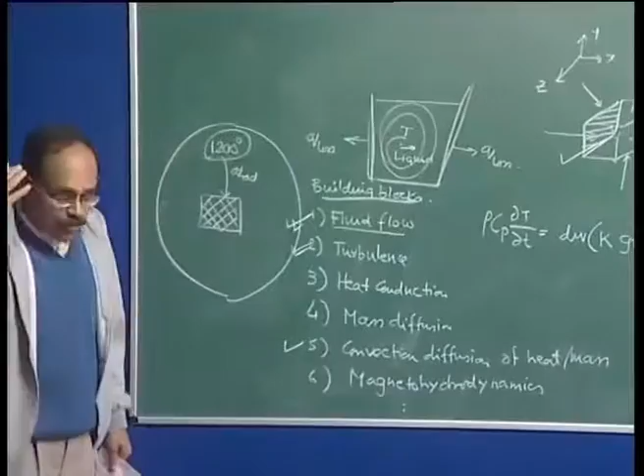This convective heat transport I will not be able to address unless I know fluid flow. So, therefore, fluid flow I will have to use, and if the flow is turbulent, in that case I will use turbulence also. So, these three building blocks will formulate the mathematical framework or provide the mathematical framework for prediction of temperature. Of course, when we talk of this convection diffusion of heat, in that case we will require thermal boundary conditions to be prescribed.

All boundary conditions have to be prescribed, whatever is necessary. As far as writing the governing equations are concerned, we will select fluid flow, we will select turbulence, we will select convection diffusion, and then identify the dimensionality of the problem, whether it is steady state or not. From the innumerable number of equations available under each of these categories, we are going to pick up the right equation.

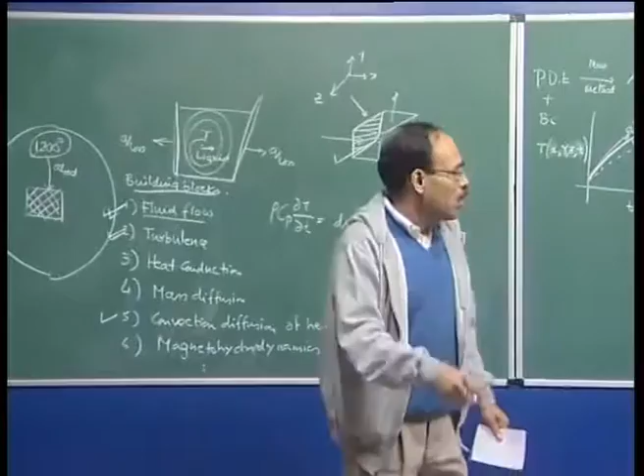The last point I want to make is, we have many phenomena which we may have to calculate simultaneously. We may have to calculate electromagnetically driven flows, for example, if you want to simulate fluid dynamics in continuous casting slabs, where we may have electromagnetic braking, electromagnetic stirring. So fluid flow, turbulence, heat transfer, many phenomena can be simultaneous or interrelated. We have multi-phase flows if you are injecting gases, we have slag metal mixing, heat loss, fluid flow, turbulence, and in continuous casting you may have magnetohydrodynamics. So you may have many such phenomena, not just one.

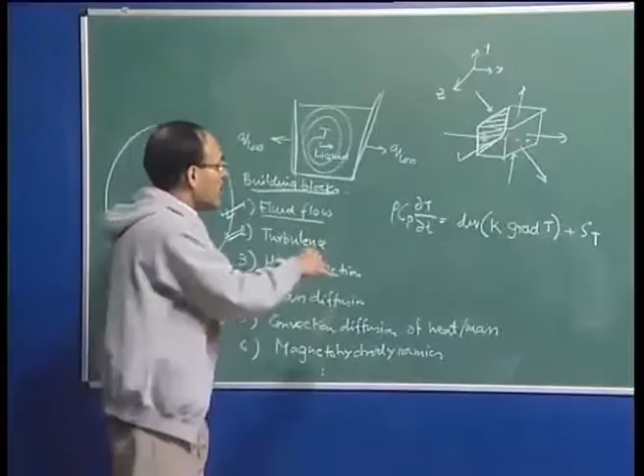In the case of slab reheating, it is just heat conduction, but when you are talking of liquid state processing operations, you may have many different interconnected modules to be used simultaneously to predict a given phenomena. So we are talking about solving a series of nonlinear partial differential equations. The equation is not going to be only one, there may be several tens or dozens of such equations we have to solve, and these equations are interlinked with one another. These equations are nonlinear, and the boundary conditions may also be complex, nonlinear boundary conditions.

So solving this equation is a horrendously complex task, and if you have to write a computer program, this is going to take many months before you can write the program to solve this set of equations and derive a meaningful result of temperature within the ladle itself. So what is the option? There comes the role of commercial softwares. Today, engineers and particularly people involved with steel making and process modeling have to know what commercial software platforms are available which they can effectively use to solve the equations.

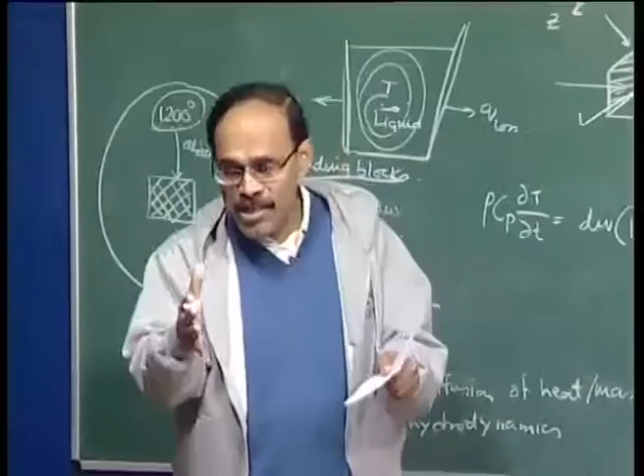So your job ends at formulating the problem, and then you configure the problem with the aid of commercial softwares. When I talk of solutions, the solution essentially encompasses writing the equation, coding the equation in a computer, and then getting the numbers. This coding part can be totally eliminated if you resort to commercial softwares. Two commercial softwares which are very popular today are Fluent and COMSOL.

Most of the mechanistic models that we use for steel making can be solved using Fluent. Fluent has all these modules, all these building blocks built in. You just have to say that it is three-dimensional, unsteady state, turbulent fluid flow, and Fluent is going to pick up the correct equations for your system from the building blocks in its memory. Using this commercial software, you will be able to get the numbers or generate results in practically no time, and then you can post process.

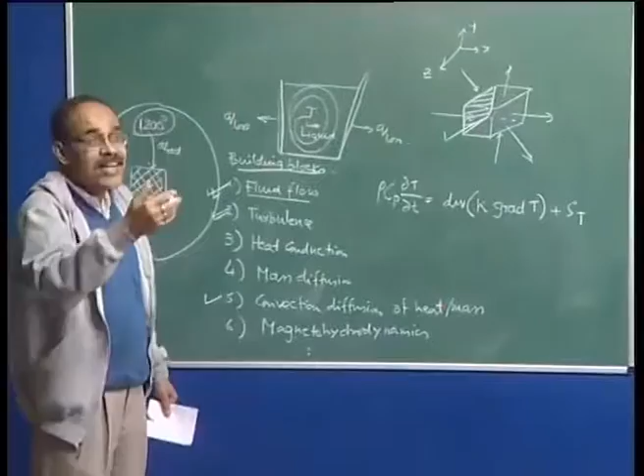That means you can plot and scientifically visualize the results. How is the temperature changing as a function of time, or how is the velocity changing as a function of time in a ladle. All these features, you can draw nicely, scientifically visualize, and obtain useful information of the process.

So to conclude the discussion on physical and mathematical modeling, I would say that mathematical modeling is a very important part today, because physical modeling alone does not give us a complete picture. So mathematical modeling and physical modeling should be applied together.

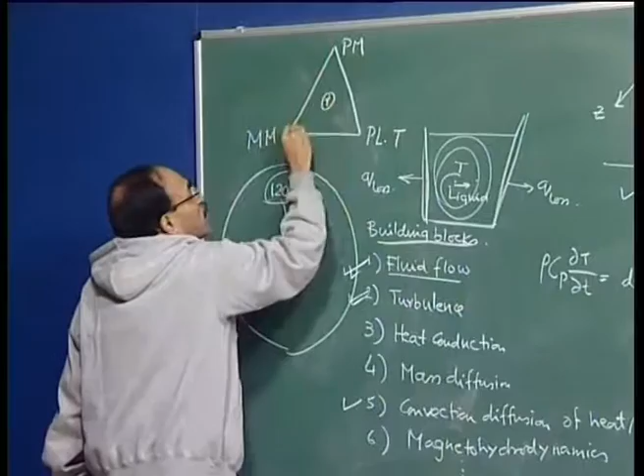Typically, finally I would say that if you draw a vertex triangle, in this vertex lies the physical model, in this vertex lies the mathematical model, in this vertex lies the plant scale trial, and there is the truth. So in order to hit the truth, you have to have these three components, and only then can you possibly do process analysis, process design, and optimization correctly.

So any comprehensive investigation on steel making must therefore embody physical modeling, mathematical modeling, and plant scale trials in different proportions depending on your resources. When these three are combined together, you are in a position to get some meaningful results, and that is where the truth or the real process lies. It is with this comprehensive knowledge that you will be able to do process design, process analysis, process optimization, and control far more effectively.